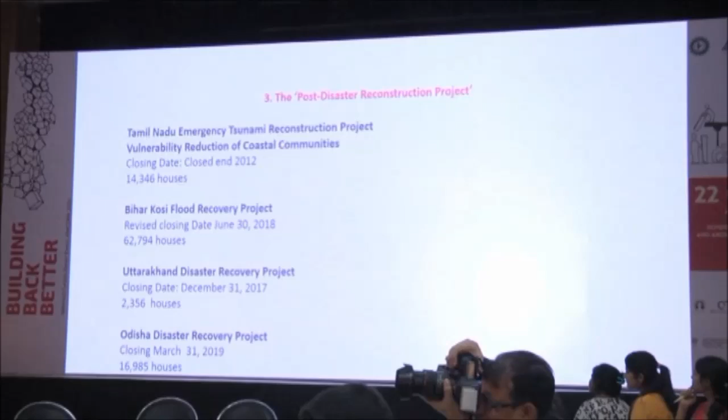Then you put together a post-disaster reconstruction project. We have four projects we've been working on recently at the Bank. The first one, in a classical sense, is not a post-disaster reconstruction project, because we are not building houses that were damaged by the tsunami, but ones that were vulnerable — which is why it's called the vulnerability reduction of coastal communities. To give you an idea of scale: over 14,000 houses in Tamil Nadu, over 60,000 houses in Bihar, about 2,500 houses in Uttarakhand, and about 17,000 houses in Odisha.

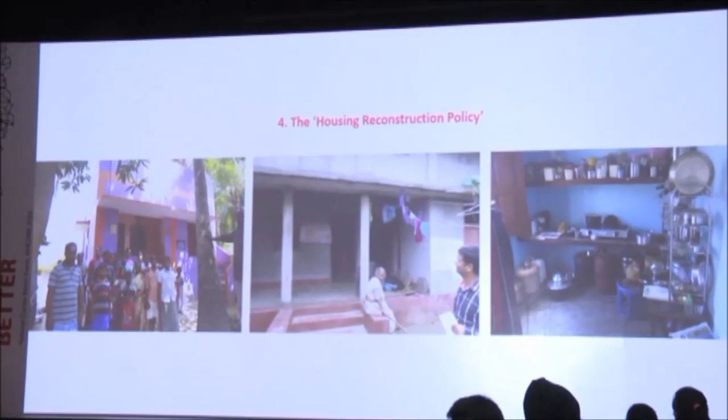So typically when there is going to be a post-disaster reconstruction project, the government has to come up with a housing reconstruction policy. At face value it looks like a dry document, especially to architects, because we want to get straight into designing spaces and looking at cost. But the housing reconstruction policy lays out the overall framework, the rules, regulations, who's going to be a beneficiary, the criteria for selection, and so on. It's a very important document — search for it online and you'll find it for Odisha, for Tamil Nadu, and they're really interesting to read because they lay out how the reconstruction is going to happen. In the absence of a housing reconstruction policy, you get all sorts of people coming in doing uncoordinated work, which impacts our ability to build back better.

Step 5: the housing reconstruction policy will identify the reconstruction approach. I've broadly defined them as owner-driven, contractor-driven, and mixed. Just like Sandeep was talking about earlier, the whole focus now is owner-driven. But for example in Tamil Nadu, the communities said they were happier with contractors building for them. We did a mixed approach, where a third-party NGO came in and supported the communities on the social and technical aspects, also acting as a go-between for the contractor, the government, and beneficiaries. I'll talk more about this as we go along.

The house on the right that you see is in Tamil Nadu, the one in the middle is in Uttarakhand, and the one on the left is in Bihar.

Beneficiary selection is an extremely important part of the whole process. Typically, one criteria is that the house is damaged beyond repair by the disaster event, which would primarily be post-disaster reconstruction. You may also include houses vulnerable to future disasters, based on damage or location. For example, a village destabilized by an earthquake in Uttarakhand may face a landslide the next time it rains, so you ought to think about shifting them out from there.

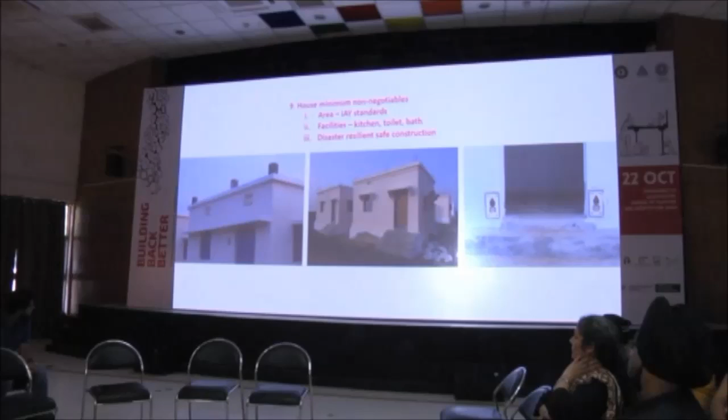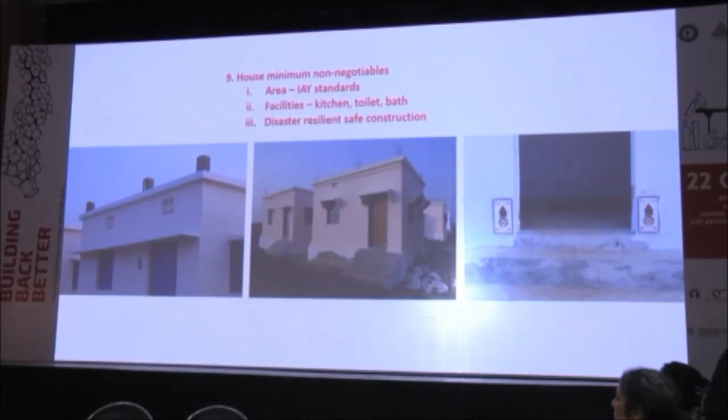A house would typically be defined broadly not as a standard design, but as a standard set of non-negotiables — minimum area, minimum facilities like a kitchen, toilet, bath, and rooms, and that this has to be disaster resilient construction. This is just a quick snapshot; there are more aspects, but this is broadly what we ensure. We are not insisting people build a particular plan, but we are insisting they achieve these minimum non-negotiables.

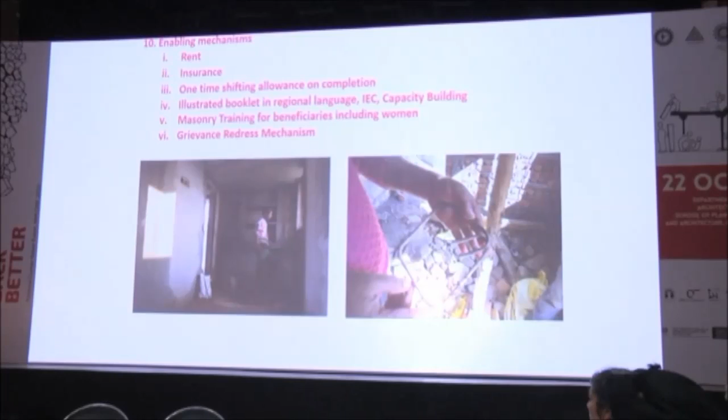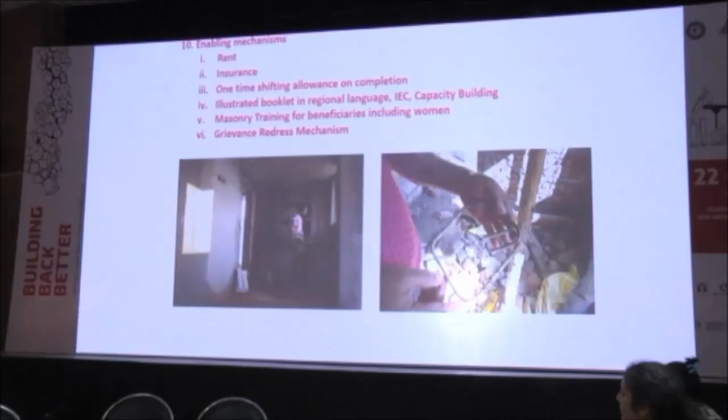Then there are also enabling mechanisms. A reconstruction process can take a year or longer, so typically a program will give people rent, because they may have to move out of where they stay for a year or longer and rent a place. You can also insure the construction right from when it starts — imagine you're building and another earthquake hits you, or another flood, or a cloud burst, and you lose everything. So you insure the building process.

You also build in a one-time shifting allowance. When people move from one house to another after a year and a half, you put in some money there as part of your program.

It's a very small amount, but it makes a lot of difference when people are actually shifting. There's a whole set of communication and training material that needs to be generated so people understand what the house is like, what are their options, costing, construction details.

Masonry training for beneficiaries, including for women, is very successful. In Odisha, we've had cases where women's groups were trained as masons and they actually went ahead and rebuilt their own houses. Imagine the sense of ownership that comes in a process like that.

And to have a very robust grievance redressal mechanism is important. People have complaints, they have questions, they need to know where to go, and they need to get responses in time.

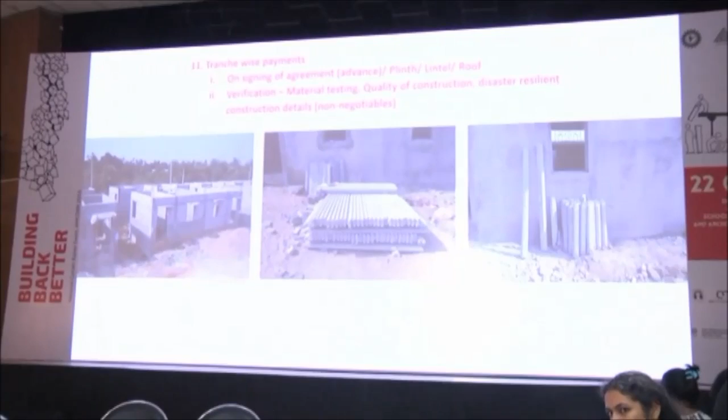So typically in an owner-driven reconstruction process, the payments—let's say the budget the government decides for reconstruction is 60,000 rupees or 3 lakhs, whatever it may be—you divide it into tranches. Typically you get the first tranche when you sign the agreement, and then based on different stages of construction, it could be plinth, lintel, roof, or something else.

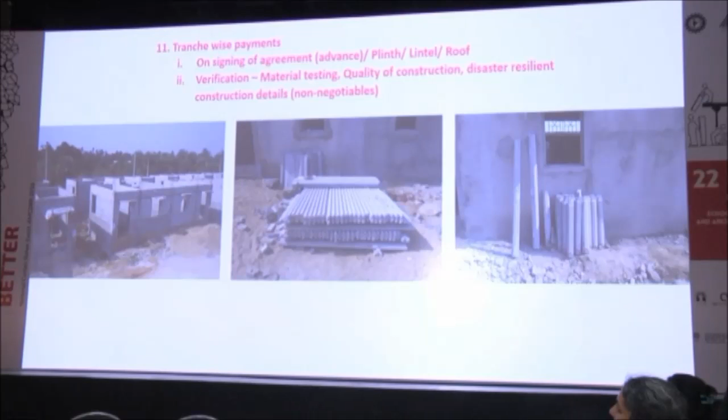This is typically linked with verification of certain quality and minimum standards at every level. So let's say the beneficiary has not really built the plinth to quality, you can in a way force him to correct what he's done wrong before he gets the second payment. That ensures a sort of inbuilt mechanism to guarantee quality of construction. There are of course other mechanisms to do it, but this is just to give you a snapshot.

Now, especially when looking at relocation sites, there's the whole challenge of site infrastructure. Sometimes these sites don't have access, so people improvise and may encroach on forest land or other land to create a road for themselves. But there has to be proper site access infrastructure, and this sometimes has to be budgeted for separately.

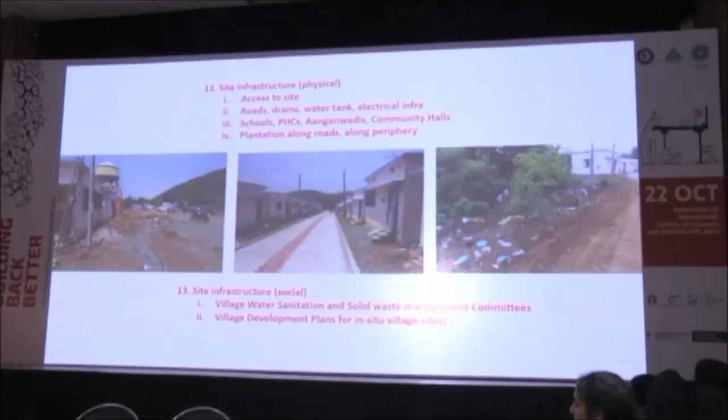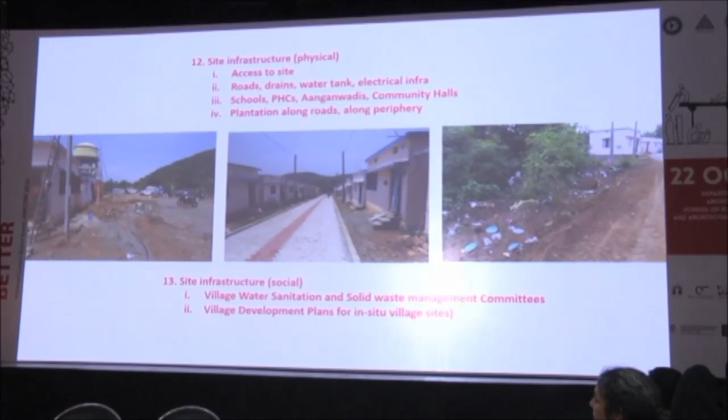It's not part of the house reconstruction. There are issues like internal roads, drains, water tanks, electricity supply, and then community infrastructure like schools, primary health centers, aanganwadis, community halls, and also lesser important but actually very important things like plantation of trees. We have to be careful about the kind of species we plant, to make sure these trees don't fall on the houses in the next cyclone.

There's also an important social site infrastructure, and I've listed two things here. One is a village water sanitation solid waste management committee. This typically happens where people are moving into new houses but also adopting new practices—often people didn't have toilets earlier, and now toilets are part of the new habitat, so we have to know how to manage them, keep them clean, and have water supply.

In places where we are rebuilding in the same location, those villages may also require development initiatives, and we use a mechanism called village development plans that help people identify, in a participative way, what interventions they want to improve their life. It could simply be a small flood shelter because that area is prone to flooding, or a facility like a school or anything they choose.